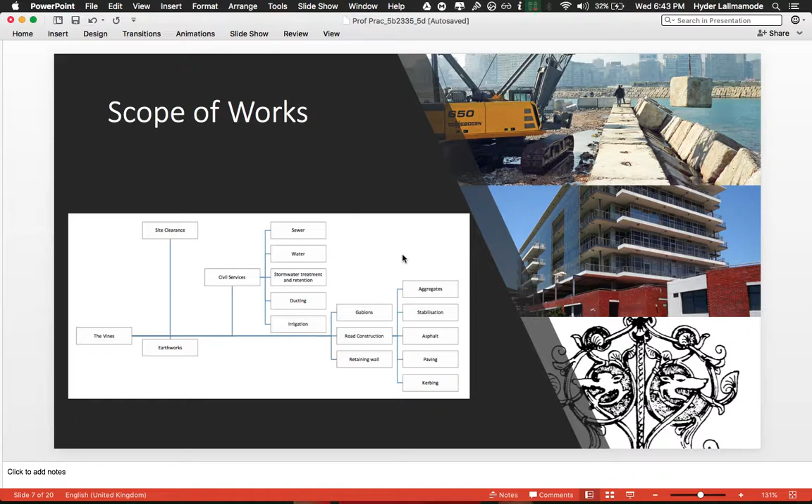I will now take you through the SANS 1200 documents. Just like quantity surveyors use the ASAQS standard system to measure building works, civil engineers use the SANS 1200 standardized specifications in order to build up bills of quantities. This civil engineering standard system splits different civil engineering works into various SANS 1200 documents. For the purpose of this assignment, only site clearance and earthworks, that is, SANS 1200C and SANS 1200D, respectively, shall be scrutinized.

SANS 1200C deals with the removal of vegetation, boulders on site not exceeding 0.15 cubic meters, surface obstructions, fences, existing buildings, and dismantling steelwork. For this project, the site must be cleared so that the construction of buildings can proceed. I will now be evaluating the bills of quantities that the project has. The first section is the clearance and grubbing of the material.

General notes from SANS 1200 include the item being measured in hectares, the site area to be cleared and grubbed measured to the nearest 0.1 hectares, pipelines with specified width shall be measured to the nearest meter or kilometer, and the removal of trees not exceeding 1 meter girth and boulders not exceeding 0.15 cubic meters are included. When comparing that with the BOQ that the project has, clearing and grubbing of earthworks and roads are measured in square meters instead of hectares, and pipelines measured followed the standards of measurement as required.

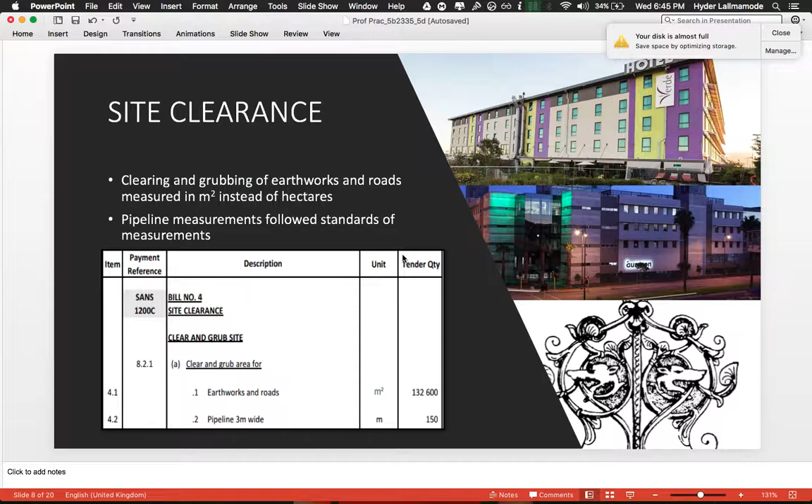For the removal and grubbing of trees and large tree stumps, when we look at the BOQ, all trees were measured in number, which is required, and trees and tree stumps were measured separately. This does not follow the standard system, as they were supposed to be measured together with respect to the girth category stated, which are exceeding 1 meter and not exceeding 2 meters girth. The other one is exceeding 2 meters and not exceeding 3 meters girth, and thereafter exceeding 3 meters in succession

of 1 meter respectively. Also, the BOQ shows tree stumps measured exceeding 0.5 meters and up to and including 2 meters. This isn't in accordance with the standard system of measurement, as firstly, tree stumps aren't measured separately from trees, and secondly, the relevant category is exceeding 1 meter and not exceeding 2 meters girth. Trees with girth not exceeding 1 meter are measured under clause 8.2.1 clear and grub.

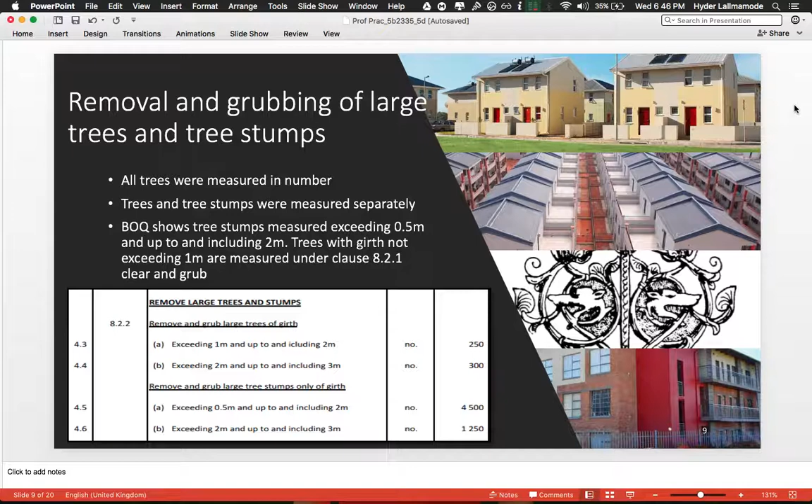Moving on to the removal of topsoil. As we look at the BOQ that the civil engineers measured, the item measured is referred to as clause 8.3.1.2 of SANS 1200D, which is for the removal and conservation of topsoil. This is correct, as the topsoil has to be conserved as per clause 5.6 of SANS 1200C. This item should then have been measured under the earthworks trade bill instead of site clearance.

The other thing noted is the unit of measurement was meter cubed instead of meter square, therefore the quantity will be different. And the last part is finishing topsoiling and grassing was placed under site clearance while it is under earthworks, clause 8.3.10 of SANS 1200D. This item should have been under the earthworks trade bill.

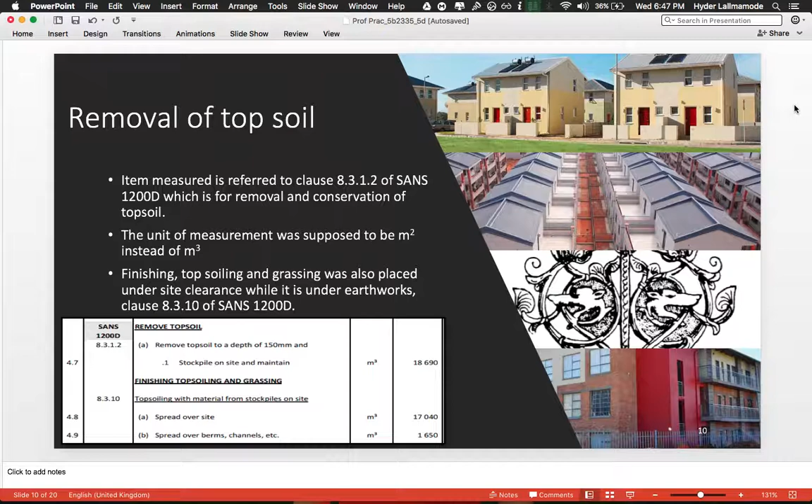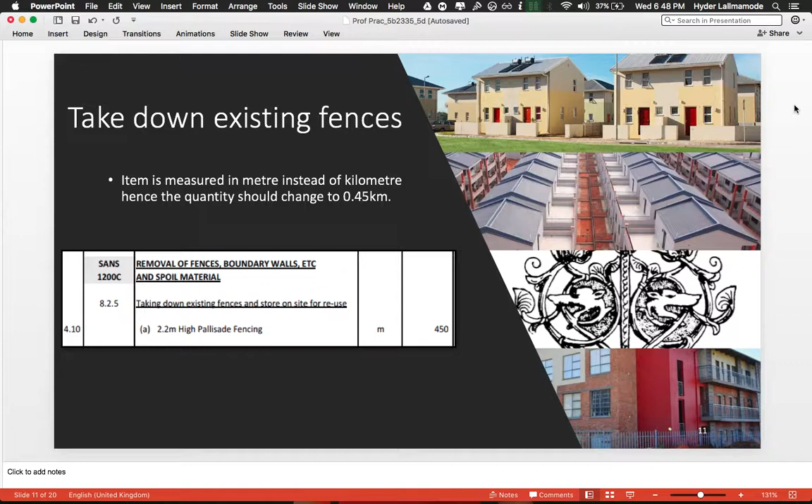And lastly, for this section is take down existing fences. As per SANS 1200C, the unit of measurement is kilometers, but we see from the BOQ that they've measured in terms of meters. Therefore, they did not follow the standard system, which had to be kilometers. And now Hyder will take you through SANS 1200D.

Thanks, Mercy. So, the first thing that was noted in the earthworks BOQ is when we look at the bulk excavation, item 5.1 was measured according to payment reference 8.3.2, and the comparison is that instead of the engineer using cut to stockpiles and cut to fills, he should have used bulk excavations, which is in accordance with the SANS 1200D document.

Additionally, item 5.1 is accordingly separated. The excavation of soft sediment from the bottom of the dam has been accordingly separated following the SANS document, which is in a proper order.

As for item 5.4, the engineer had one item for extra over for all the different types of excavations in 5.1, 5.2 and 5.3. The extra over presented in the BOQ was for Class A boulders only. No extra over item was measured for intermediate excavation or hard rock excavation, which might have been the case on the site. That's why they decided to include only Class A boulders and not intermediate excavation or hard rock excavation.

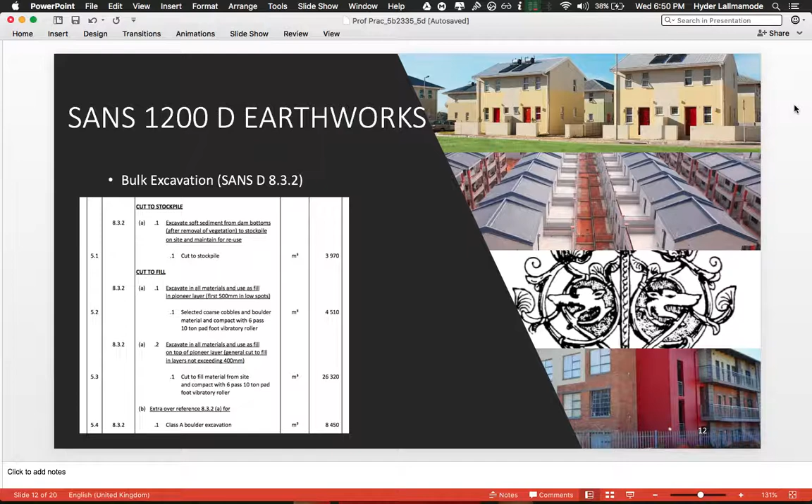Next, we have the importing of materials, which is payment reference 8.3.4. Items 5.6 and 5.8 distinguish everything accordingly as required by the SANS document. It separates borrow pits and commercial sources. Items 5.6 and 5.7 are measured according to the SANS 1200 document, that is, in meter cube and as a sum, respectively. It should be noted that item 5.8 is not measured as an extra over, as was required by the SANS document. However, the unit of measurement was correct.

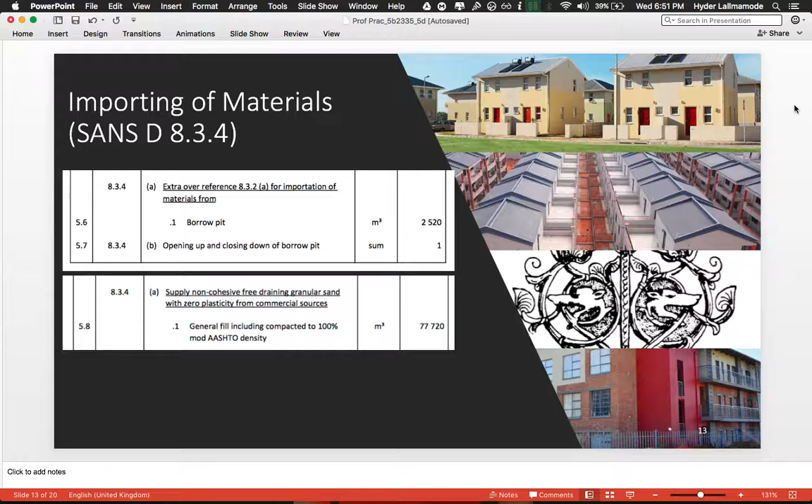Next, we have item 5.5, which was measured as an overhaul. However, this item was measured as an extra over to item 8.3.2, but it's measured in meter square when the SANS document requires the measurement to be in meter cube.

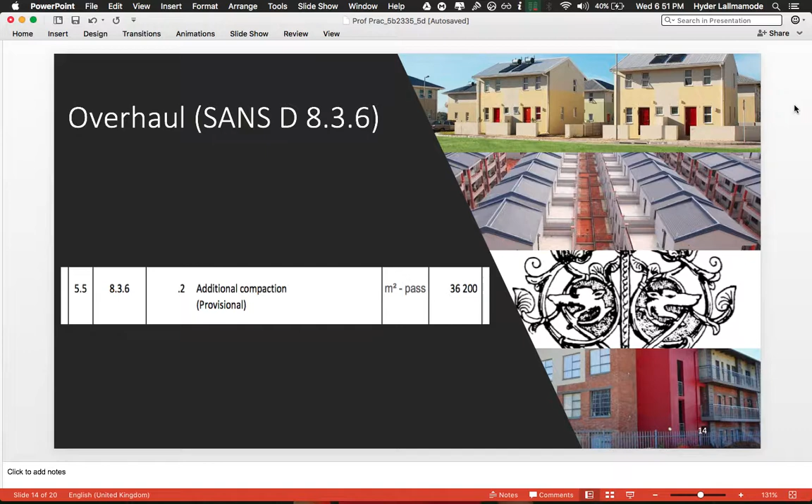Items 5.10, 5.11 and 5.12 made reference to the location of existing services as identified by clause 8.3.8.1, items A to C. All the subsections were measured accordingly, except for B, where it should have been measured in normal working hours, but was however measured in number of days.

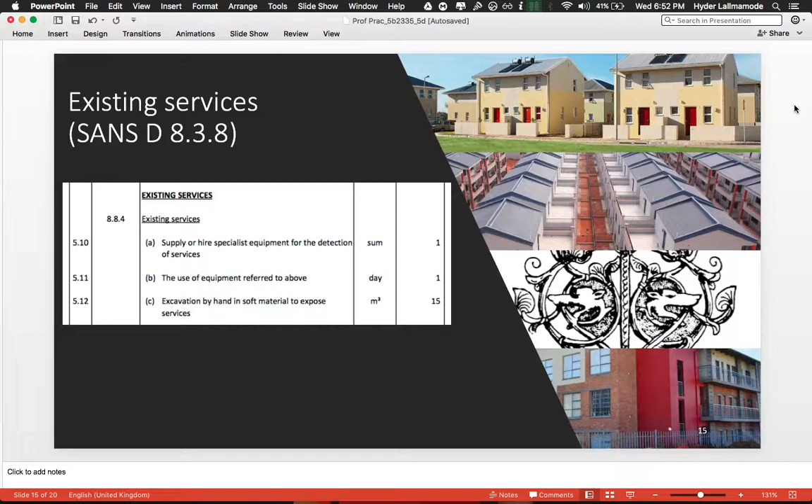This item of topsoiling wasn't referenced, and while looking at the SANS document, we noticed that item 5.9 could be linked to topsoiling, as the description is the same. However, the unit of measurement in the civil engineering BOQ is meter cube, whereas in the SANS document it's meter square.

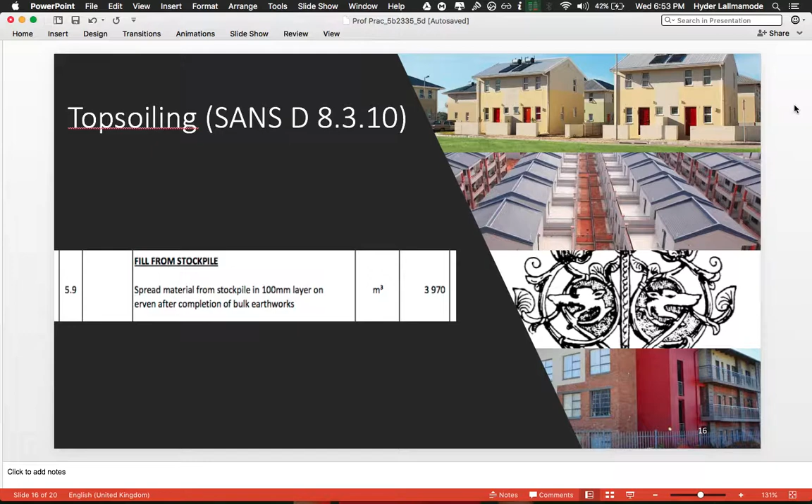For the geotextile item, this item was not in SANS 1200D, but was found in SANS 1200DK, and it's payment reference 8.2.4 and is measured in meters square as it's measured in the BOQ.

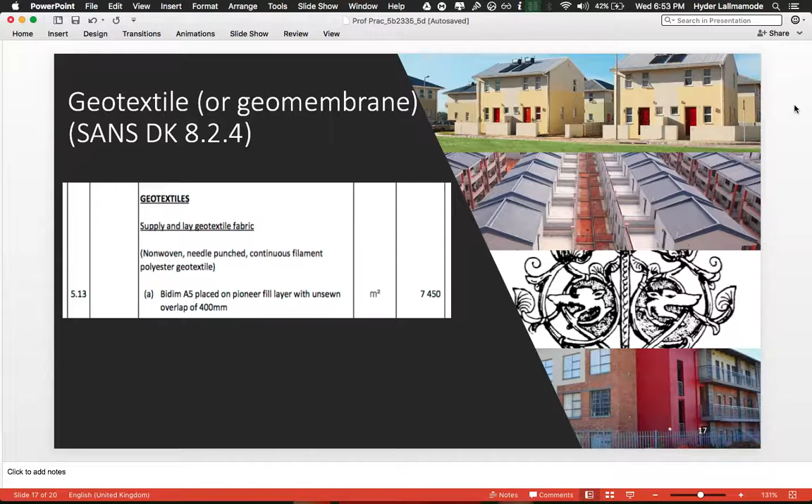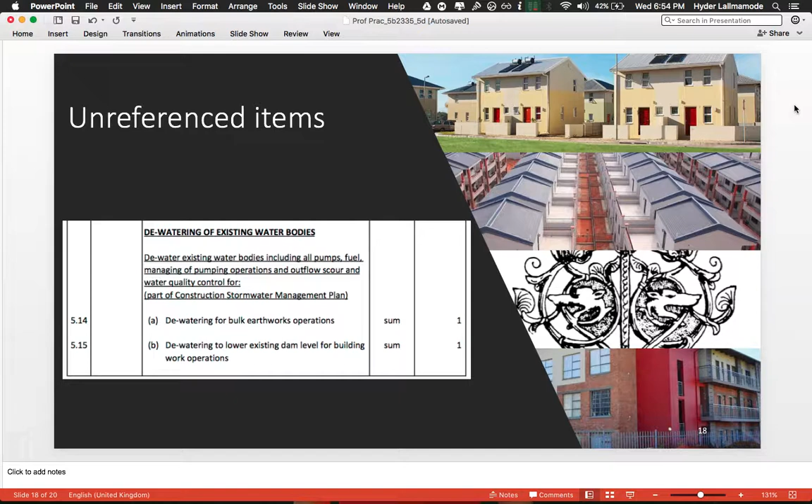The last two items, 5.14 and 5.15, did not fall under any of the clauses of 8.3, which is the scheduled items. We were therefore unable to locate the specific clauses which address dewatering. The engineer, however, used those two items as a sum, which might be for an allowance, should dewatering be needed.

In conclusion, it can be said that on completion of this assignment, the whole ethical consultant group had a better understanding of the SANS documents, more specifically SANS 1200D and SANS 1200DK. The most important information in the bills of quantities is the payment reference. Without this piece of information, it would be very difficult to understand how the works were measured, as some of the items in the civil engineering BOQ were not referenced. It was difficult for us to locate where those items were coming from.

Additionally, we also concluded that the SANS 1200 series is only a guide for civil engineers. This is because even though everything has been laid out in a certain way in the SANS document, civil engineers do not necessarily follow those rules. These specifications are fluid in nature and can be shaped in any way that the engineer wants, as long as a comprehensive bill of quantities is produced.